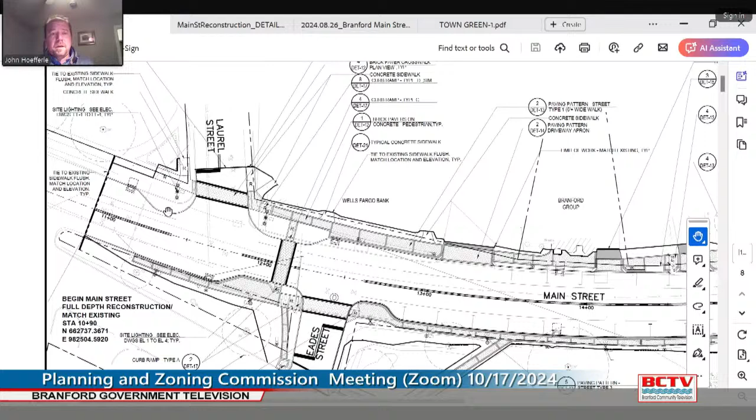So with that, I don't know if I'm able to share my screen... Good. I'll just run you through pretty quickly unless there are other questions you have specifically about the plans. You can see the limits are about Laurel Street, but Blackstone Library is here.

The police station is down Laurel Street, so that's where our improvements start. This is DOT Route 146 that comes down to South Main. There aren't a lot of substantial changes on the limits of where the brick or concrete in this particular area will be replaced.

We are shifting some of the curb lines down, like in this area - the existing curb is here. You'll see that throughout the project where we're creating neck-downs to try to slow traffic. We're also incorporating formal crossings at a lot of places where there currently aren't any.

I'll try to move through this slowly but quickly. You'll see there's a little bit of changes along the curb lines, but again, the limits of where the brick currently is will remain. We are adding, as I mentioned, the ADA accessibility standard, so we're adding here a flush condition, so now we'll be with the current ADA standards.

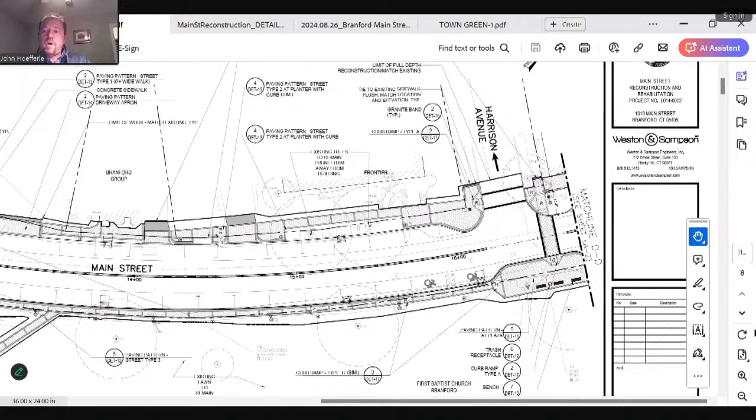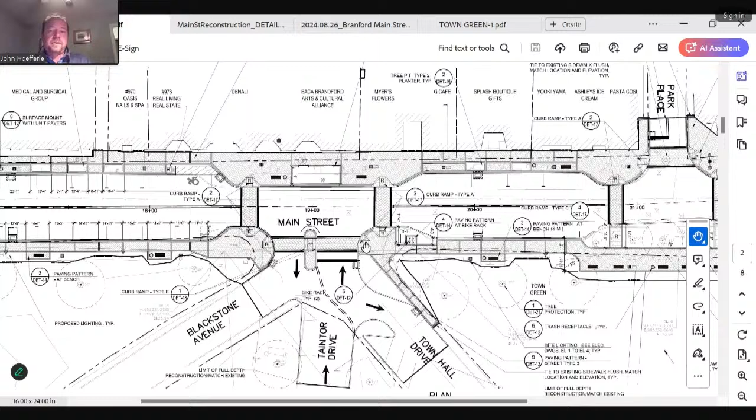That's a big goal of ours, really a requirement of ours for this project. We'll continue down. You'll notice that we are reconstructing this intersection at Town Hall Drive. Right now this is about a 70-foot crossing, and we see it all the time, women with strollers or men with strollers walking across that 70-foot crossing, looking over their shoulder because you've got traffic coming all over the place. So we are reconstructing this with a pedestrian island to shorten up those crossings here.

Long term, Town Hall Drive is slated to be reversed, so you'll enter off of Montowese Street and come through Town Hall Drive and come out. This is going to avoid a lot of conflicts that we see here, as well as, I'm sure everyone's left Town Hall Drive looking to the left and can barely see cars coming. We've got a little mirror up on a power pole if you didn't notice. You try to see anyone that's coming, and especially around festival time, it's a really dangerous situation.

Again, just making some improvements here to the brick. The brick will be clay brick, not concrete pavers. We've seen those pavers really deteriorate pretty quickly, especially with the amount of salting that we have to do in the center of town to keep people safe in the winter.

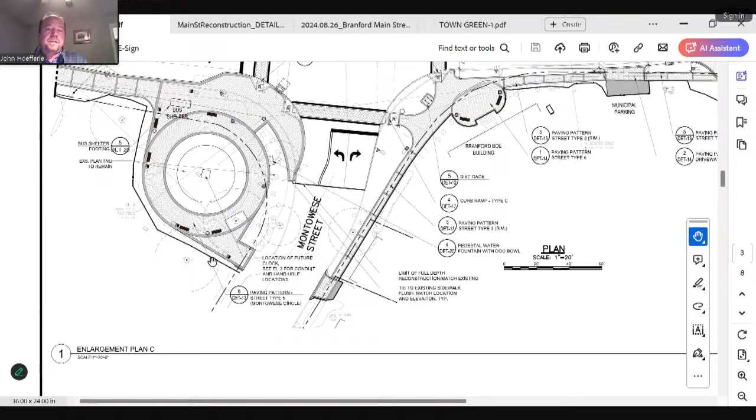So those will all be clay brick. We are extending out to the circle here around the Memorial Garden. And again, I mentioned this is a Main Street reconstruction, so we can only go so far with the money from DOT under that grant program. So as much as we'd like to continue down Montowese or down these side streets, we really have to stick to Main Street — it's a requirement of that grant.

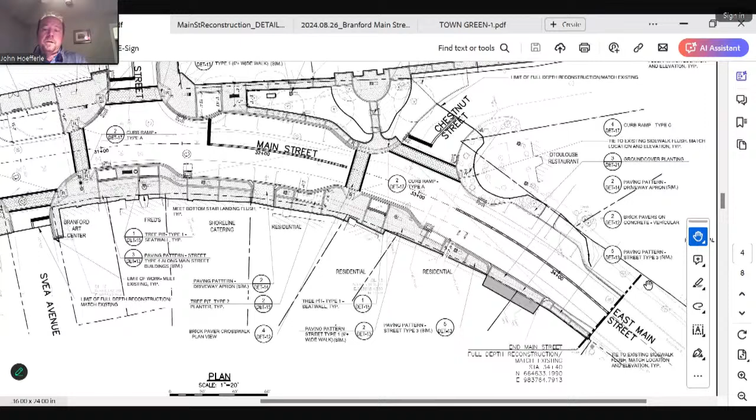We continue down. There's some grading that will be changing over here. We need to make all these buildings ADA compliant. Coming down this hill is pretty steep, but we're going to try to make it work as best we can. The other limit of construction is down here by the old Otoolouse restaurant past Chestnut, with plans to hopefully get the same type of funding for where we end here all the way to Route 1, to mill and pave and finish off the whole section of Main Street from a DOT roadway to a DOT roadway. So we do have some additional details to show you.

Some additional details to show you. We are trying to get street furniture included under this grant program, so that includes some benches, some bike racks in areas, and new garbage cans. These details give you a little idea of where we're trying to create some amenity zones, so to speak. We are also trying to get some rain gardens as part of this project, which we'll show you in a second here.

These are just some of the design elements that may be of interest. This is one of the main rain gardens that we will be creating, down by Ivy Street. You'll notice what looks like railroad tracks — that's a throwback to the trolley tracks that are currently still underneath Main Street. We're hoping to salvage some of those rails and use maybe some old salvaged granite curbing from this job to create that throwback to the heyday of Branford's Main Street, while also letting some of the street runoff be treated within a rain garden type of treatment there.

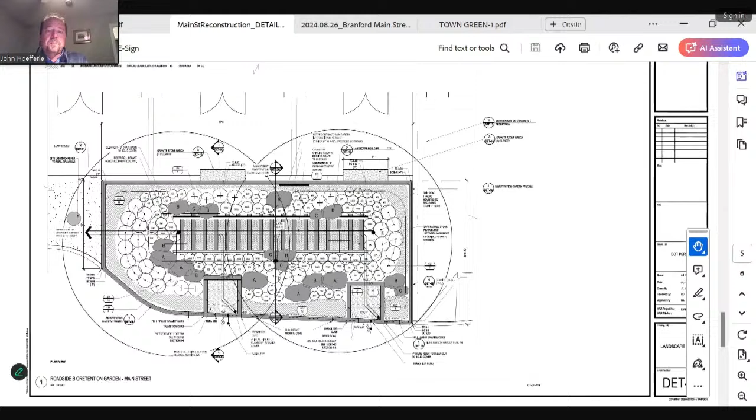Before I get into that, if any of the commission members have any questions on what I've gone over so far.

Thank you, Mr. Hoefferle. Any questions, comments from commission members on what's been said up to now?

I have just one observation, and it's kind of a multi-part observation. I think this is all great, and I understand the concept of brick as the go-to for pedestrian scale, human scale kind of stuff. But brick is also kind of a modular thing, and it works great in cities that have sidewalks laid out like graph paper, like Manhattan or Philadelphia. As I walk through town, I see the brick being tortured into trying to conform to curves, and you always get these sort of ridiculous little slivers. So I was happy to see some herringbone pattern in here, because that's a little more forgiving of that.

I got a tiny bit itchy when you said it's going to be clay brick, because even SW brick, which is what you would use as a paver, still has a hard burned exterior and a soft interior. So when you have these little slivers packed in there, you're going to have a slightly higher propensity for degradation with the salt that you're trying to avoid with the concrete brick.

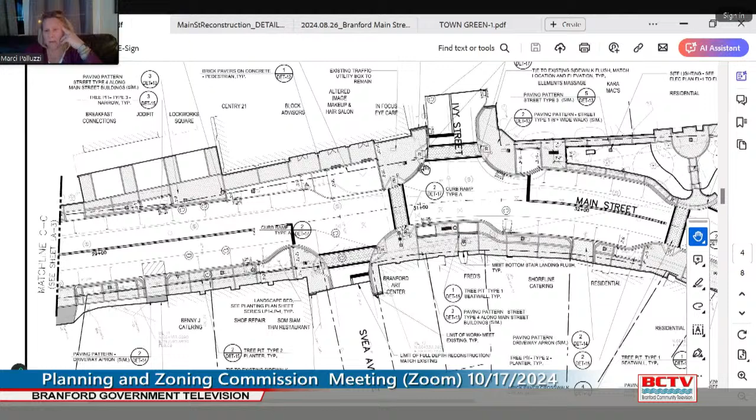I was just curious what discussions might have transpired about doing speed humps. I've noticed you've relied on chicanes as the primary way to still have parallel parking and slow traffic down at the intersections. I was curious if you'd done anything with speed humps. My other question is, I love the idea of a rain garden, but without a really good maintenance plan, that can become quite unkempt at certain times of the year. So I'm curious if we've got our arms around what that's going to take from public works to maintain it, to keep it beautiful as well as functional, because the function is a great idea. But those are really my two comments, and everything else looks fabulous.

As to your second point, yeah, that's something that's going to be considered by the town. There's money set aside for center maintenance, so whether that's hired out - right now I believe we do hire out the maintenance of those landscape beds - that would be something they'd have to pay closer attention to, especially in those first couple of years as things are trying to really develop.

But to your first question, we did hear a lot about speed humps and traffic calming. We wanted to avoid speed humps based on the fact that we have emergency vehicles that need to get through this area pretty quickly, and there's a lot of truck deliveries too. Between slowing down emergency vehicles and the noise from semi truck deliveries, plus school buses coming through, we wanted to avoid that and really try to just skinny things down as far as traffic calming, and make sure we have proper signage everywhere, because right now there's really a lack of signage through this area.

That's all going to be upgraded as we're required to through DOT as well. But we want to make sure that people are visible. When you get these bump outs and shorter crossings, people become more visible as they're waiting on the curb. So between that and getting enforcement stepped up throughout town, hopefully we can get back to that kind of attitude, because I think when you hit people in the wallet, that's when they really learn to change their behaviors. So, appreciate the comments.

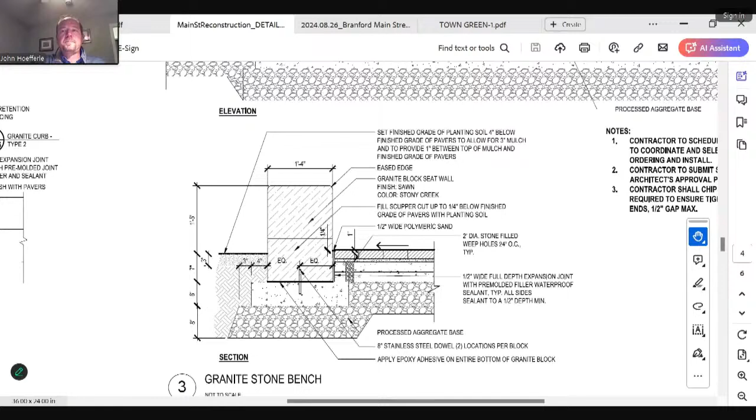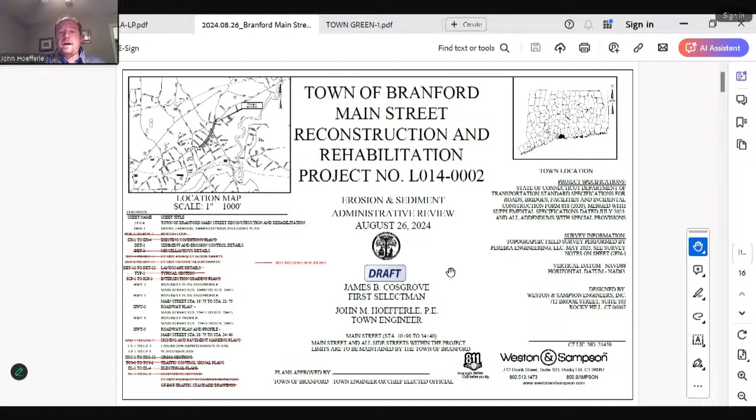So as part of this project, we are asking for concurrence from the Planning and Zoning Commission on our erosion sediment control plan. I know it's not exactly within the purview, since this is a right of way, but being that it's a sidewalk project, and mostly everything, I should say it's the road too, but everything is within a cut.

So we don't have slopes down except for really on this western side of the project, where we will have some silt fencing on the hillsides. There'll be inlet protection. It's a pretty simple erosion control plan on this.

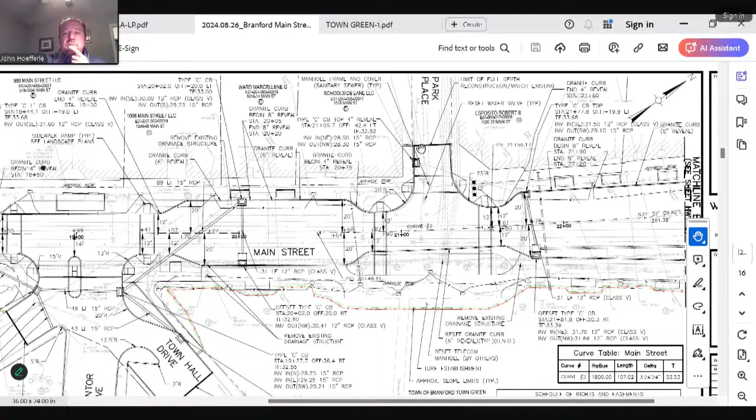I reviewed it, and just to get another set of eyes on it, I've asked the inland wetlands agent to review this as well. She had very minimal comments, and my only comments were to kind of protect some of these downhill inlets, because we know there will be some tracking on some of these side streets. So we do want to protect the inlets down the hill a little bit.

Again, it's not really a formal review, but hopefully you guys have had a chance to look at it and would agree that it really meets the intent of what your regulations are as far as sediment erosion control go.

Chuck Andres, Chair: Thank you, Mr. Hoefferle. I have one more question, comments? Sure, Marci. Yeah, I mean, you had mentioned that they were going to be rerouting, reversing the flow around Town Hall Drive.

And I know at one point there was some discussion of doing more of a roundabout, towards the library and Eads and Laurel Street. What happened with that discussion about the roundabout? And has there been any conversation about aligning Eads and Laurel Street and other traffic moves along those guidelines? Or were they just not within the scope of this project, or abandoned for some reason?

So the roundabout was actually going to be funded through this same grant program. And when we started looking at it, I wasn't around for the initial or final design of the roundabout. When we came in and started having discussions about that roundabout, we realized that DOT had a lot to say and a lot of role.

They took a very large role in the design of that, since it did start to include Route 146 in that roundabout. So instead of being just a regular roundabout, that thing stretched out forever, and included a lot of improvements on State Highway. And when we looked at the intent of this program, it was for local infrastructure.

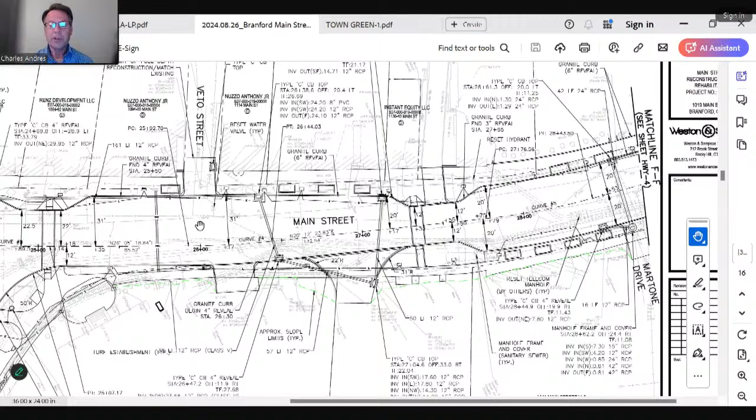Yeah, just one more thing. The town green came about - we ended up applying for a small town economic assistance grant, a STEAP grant, for the green. That's a $500,000 grant that we obtained for improvements.

Again, not changing a lot to the green. We understand it's a very historic green. We did consult with the Green Committee and the Forest Commission on what we wanted to do here, and they were in agreement.

The major change to it, I already mentioned changing the direction of Town Hall Drive. We're going to be adding a sidewalk along the frontage of this diagonal parking, which anyone who's ever parked there knows cars just pull off the edge of the roadway. People cross Town Hall Drive to get to the sidewalk on the north, or walk behind parked cars, which is not safe for people backing up and pedestrians.

So we're going to realign some of the sidewalks to the steps. This is the phase 1 drawing, so it doesn't show everything, but we're essentially keeping mostly everything the same, taking away a little bit on the south side to add a sidewalk.

On the second phase, and these are more preliminary plans, but we do anticipate replacing the walk across the green. Hopefully we have enough money to add and replace sidewalk along the north side of Town Hall Drive. And this is where you're going to see the raised crosswalk.

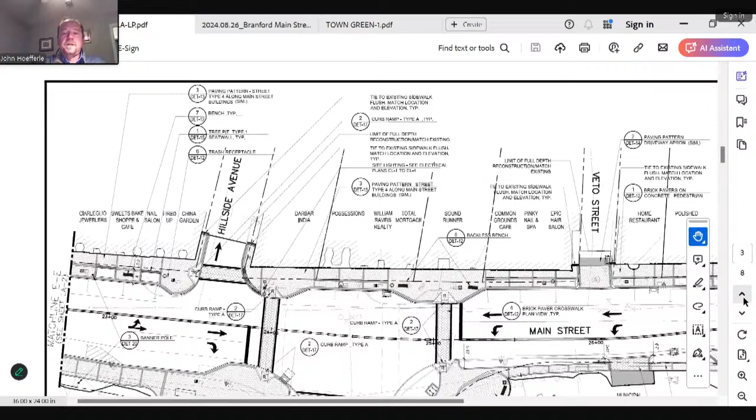So the initial plan for Main Street - again, we need to work on how we're going to get these two projects going. They're two separate funding sources, two projects, so likely two contractors. We expect Main Street to start up and do the majority of their work before we start trying to interconnect things with Town Hall Drive and the center of the green.

So this phase will likely happen first, where we get the pedestrian island in, and we'll still be able to maintain a temporary flow through Town Hall Drive the way it is.

And then as part of the Main Street project, once we have enough of the Town Hall Drive project tied in, then we'll likely make that switch on Town Hall Drive as part of the green project.

So it's kind of tricky. We're dancing around with, again, two different funding sources and likely two different contractors. But we do expect that the intersection here will be under construction or completed by the time we do Town Hall Drive and make that change.

So it's going to be a lot of confusion during the Main Street project. We understand that - there's going to be a lot of detouring, some closures of lanes and things like that. So we don't want to introduce everything at once and have nobody know how to get to Town Hall Drive, or have them coming in the wrong way when we've already switched it. So I think switching the direction will be kind of one of those last steps that we make towards the end of both these projects.

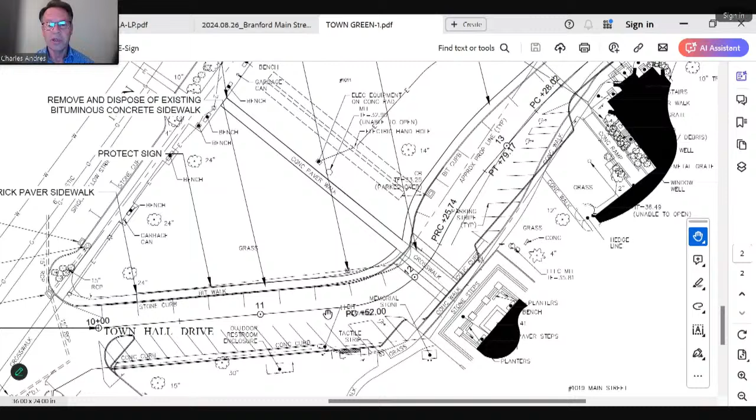I would think that's a fairly major change, and you would want to make sure that people know about it and hear any comments. You'd have to obviously change the parking layout as well.

And I assume it looks like you haven't done that yet. So I was wondering if you'd come back for that, or does this approval include that? Hopefully this would include that.

The striping isn't changed on this plan, but the curb lines are changed. The striping would basically just flip all the diagonal parking, and that's what you'd get with the final plan. So Town Hall Drive would be repaved and restriped to accommodate the flow from Montowese out to Town Hall, or out to Main Street.

Was there much public comment about the change in direction? No, actually the boards and commissions we went to were in favor of it. I think everyone understands how Town Hall Drive works and how it can be sketchy a lot of the times, so it was a welcome change.

John, are you going to have approximately the same number of parking spaces? Have you even really gone to that level of analysis yet? I'm not sure if we've designed and counted those parking spaces.

Main Street will be losing some spaces, because we currently have parking where there shouldn't be parking based on current standards, so we need to remove some. On Town Hall Drive, because of the switch, we may be losing those two spaces there and not be able to make them up, but the rest of the striping is compliant as is. So with the flip, I think we're just losing the two spaces there.

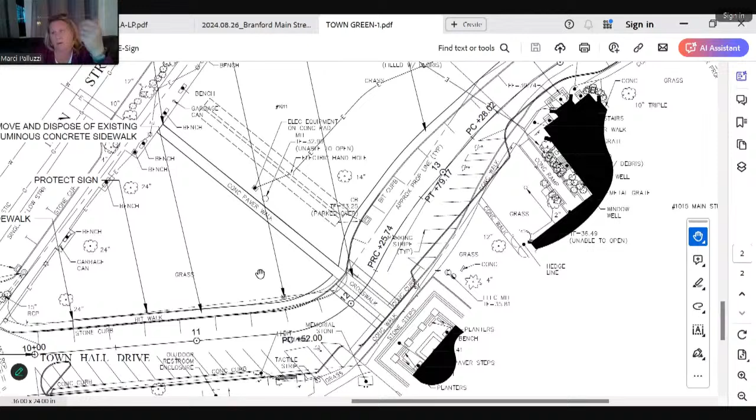So is all the electrical underground at this point, or are there existing lighting fixtures along that north edge of the Town Hall Drive? Everything's underground. And are all the light fixtures on Main Street being replaced as well, or are they just working with the same fixtures? Yeah, so all the electric is underground until you get to the limits of the Main Street project.

The wiring will all be replaced, and the light fixtures are all going to be rehabilitated. Those are all cast iron light poles, every single one of them, and we want to keep them because it's extremely expensive to replace them. You'd likely be going with aluminum otherwise, and we'd rather keep the cast iron. So those are slated to be sanded and painted, with an LED retrofit for all the lighting there, same color scheme and everything.

That said, overwhelmingly everyone said keep everything the same. So, we know change is difficult. Yeah, I understand completely.

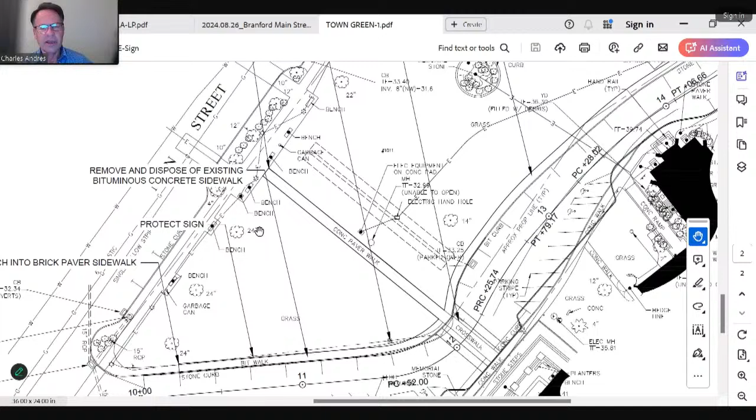John, the rationale for changing the direction, is it because there's a safety issue at the entrance? What's the main reason for that? So, we've got twofold reasons. Anyone who's pulled out onto Montowese on this side currently, the sight lines are terrible, especially looking to the left. I don't know if anyone's noticed, but on the power pole across from Town Hall Drive, there's a mirror there to try to see what's going on the left.

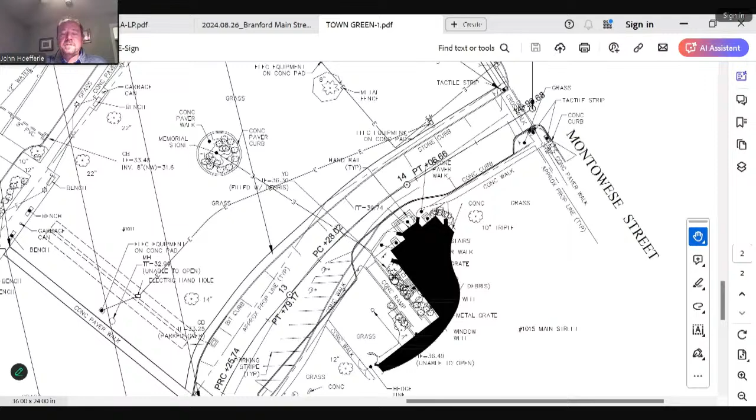Now, when you've got the festival, semi trucks are parked here, tents are set up here. It's very difficult, sight lines come through here, as well as we do see cut throughs from Main Street, trying to avoid the right turn at the light at Montowese to turn right on Montowese. So by reversing this, there's not really much reason to cut through, especially with the raised crosswalk.

And then once we get to the intersection, we can't really install this permanently and keep this flow without changing a lot of what's going on with Taintor and Blackstone. We can't reverse Taintor, that's where the school buses pull up from behind the church at daycare. And Blackstone wouldn't make sense to reverse. Just for this intersection, to get it to work, it really works well with reversing it on the Montowese side because you have that safety issue.

But the flow here would work really well where you have a stop for Town Hall Drive and a stop on Taintor. So this is kind of a natural flow, everyone coming to the right, and then coming from the left, you're just going down Blackstone. That's the only movement you'd have.

And this is integral to the project, we really wanted to shorten up this crosswalk. It is extremely wide and dangerous. We see people making U-turns trying to grab a parking spot, and sight lines aren't that great there either. People coming down Taintor have conflicts with people turning onto Blackstone and trying to turn out right. So it all kind of made sense once we started to consider reversing Town Hall Drive.

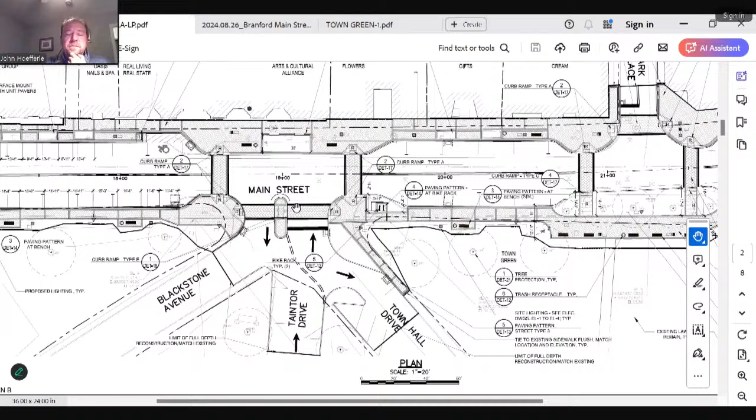I do think there's opportunity for some better design elements in front of the town hall, to feature more of a plaza pedestrian link on the opposite side of town hall as a bridge or entrance way to the green. I get that the engineers are engineering it, but I'd really love to see some landscape architecture developed as an idea. Because the town hall is the focal point and we're not highlighting it nearly enough from a landscape perspective. I do agree with all the traffic moves you're making, and the brickwork and all that work downtown is fabulous.

I think it's falling a little flat in front of the town hall. We've put a lot of time into the stairs, and that side, the main side, is fine. But once you cross the street, there's no transition to the green, or the way the green interfaces with the town hall. I think it just hasn't been thought out enough from a design perspective. When they added the direct walkway, that was a great improvement, but I think we could go further if we take a more forward-thinking approach to how the town's evolving, and not get so stuck in the fact that it's the traditional town green, where there were never curbs on the green, or whatever the more historical viewpoint is that's kind of holding it back.

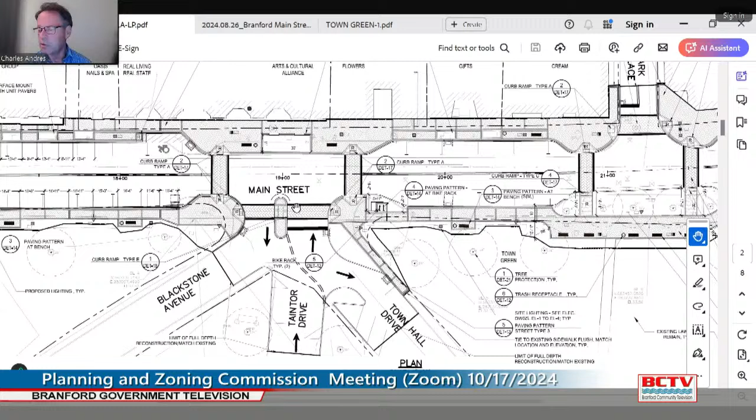Anything else, Mr. Hoefferle? That's all I have for you tonight. Okay, so I think you're looking for a positive 8-24 referral with respect to this proposal, which had three components: improvements to Main Street itself, erosion control, and the areas along the green with sidewalks, the change in directions, and other improvements. Does anyone have any comments? If not, does someone want to make a motion that we provide a positive 8-24 referral with respect to this town project?

Chadwick makes that motion. Is there a second? Marcy will second it. Any further discussion? All those in favor? Joe Chadwick is in favor. Marcy is in favor. Joe Vayuso is in favor. Fred, I see you've joined us, I don't know if you heard the discussion. You did? Okay, are you in favor? You're muted right now I think. Okay, I'm unmuted now, yeah I'm in favor. Great, and the chair is also in favor. Thank you, Mr. Hoefferle.

Thank you everyone. With that, we'll move on to our public hearings on the agenda. I'll start by just going through the items. Item number one on the agenda is Premier 200 North Main Street LLC.

This is 206 North Main Street, which opened the public hearing at our last meeting, and I believe we continued it to our November 7th meeting. So we're not moving forward with that one today, since it was continued to November 7th. Again, that's a special exception for the automobile service facility, so it's on our agenda but we don't have to do anything on it. Is that correct, Harry? Harry Smith, Town Planner, that is correct, yes.

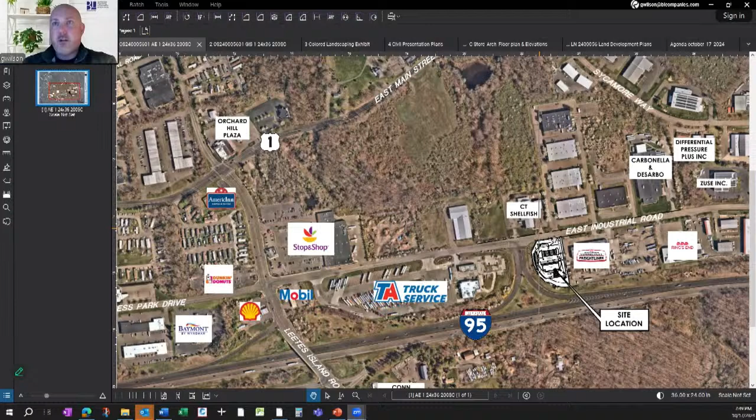The site is located here off the I-95 off-ramp. As you can see, all the local businesses there: existing gas station, Stop and Shop, CT Shellfish, Freightliner next door. We are in the IG2 zone, industrial use.

As you can see, we're fully within that and in with similar businesses. I'll jump to the landscaping plan first. This is a very odd shaped parcel, as Sarah just mentioned.

I-95 is at the bottom of the page, with the off-ramp wrapping round to East Industrial Road, which crosses our frontage. We also have a DOT non-access line, which basically starts from the bottom corner all along the ramp, for obvious reasons, and then along East Industrial Road to this point here where my hand is, hence why our entrance is in the top right-hand corner.

As you can see, we've got a mix of pumps, both front and rear. Front for smaller standard traffic, cars, small trucks, and then larger vehicles, mainly contractors with trailers or small equipment at the rear for separation. The C-store in the middle here is 5,010 square feet, with underground storage tanks to the left.

And then various underground surface water detention basins, one in the front, one in the drive aisle, and two open basins at the rear. Again, we've got the trash enclosures at the rear and the loading zone too.

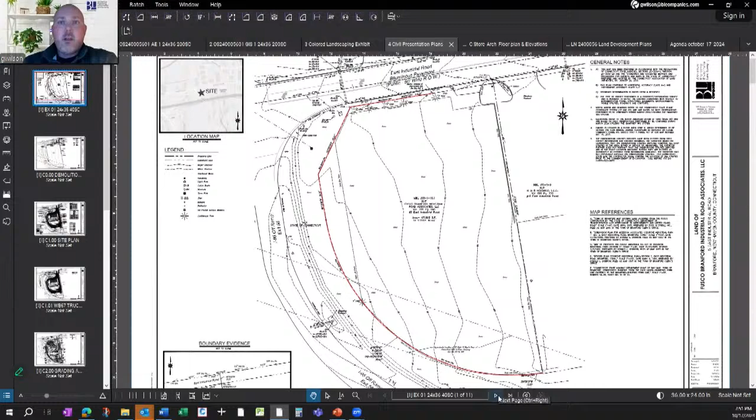The red line denotes the access, the DOT access limits, only opening up the front. Jump across to our site plan, we can show you a bit more detail.

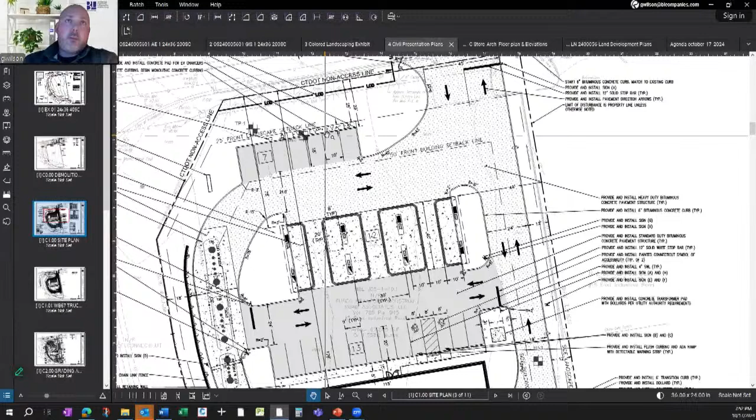situated there. We have access from both the rear and the front to the C-store. And if I just forward on, one of the questions from the town engineer was just to show why we needed such a large drive aisle curb cut.

So the largest truck here shown is a WB67. It's slightly larger than the gas tanker that will come to refuel the station. But as you can see, coming into the site, it has to make a 180 turn, which means quite a wide swing, therefore the wider entrance.

But as you can see, he can come in, around, load up the fuel tanks, and exit around the rear. And that's the plan for any larger trucks, although this really isn't the clientele that we envisage, but rather small to medium-sized vehicles using this gas station.

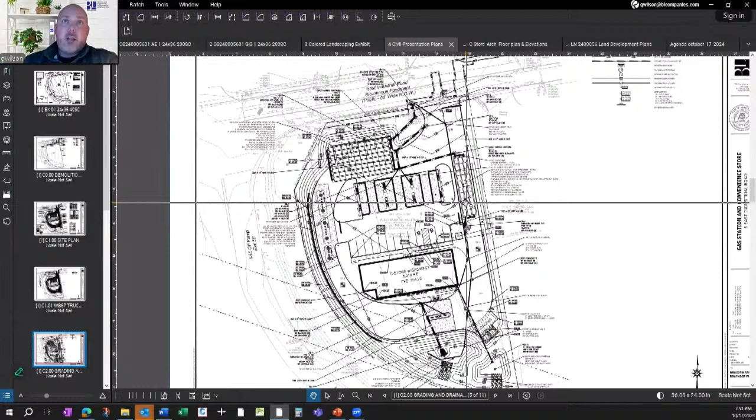Then we come to the grading and drainage plan. We've raised the site slightly, mainly because through our geotechnical investigations, we came across rock around 4 feet beneath the existing surface. Therefore, to fit the drainage systems in and actually create some depth, so they're not exceptionally shallow, we had to raise the site slightly, and we do have a retaining wall along the left-hand side here.

2 underground detention systems in the front and 2 at the rear, open at the rear.

Utilities all come in through the single curb cut because of the DOT non-access line, but all services come in there: water, gas, electric, and sewers go out there as well.

For sediment erosion control, we have the erosion control matting all around where we're regrading, which is basically around almost the entire perimeter. We have our vehicle tracking as we come in, washout pits, and then the temporary material storage shown there too.

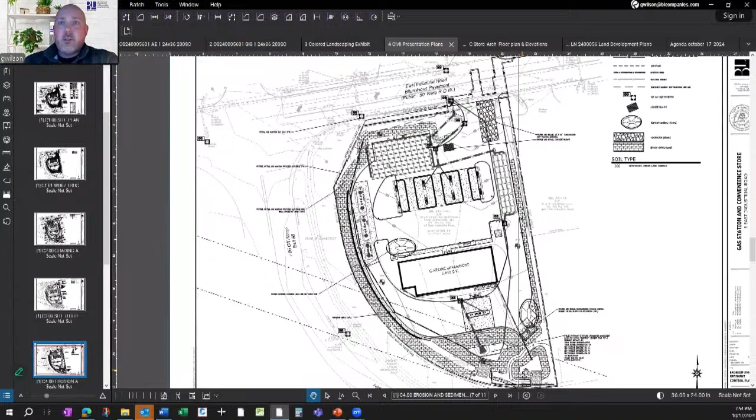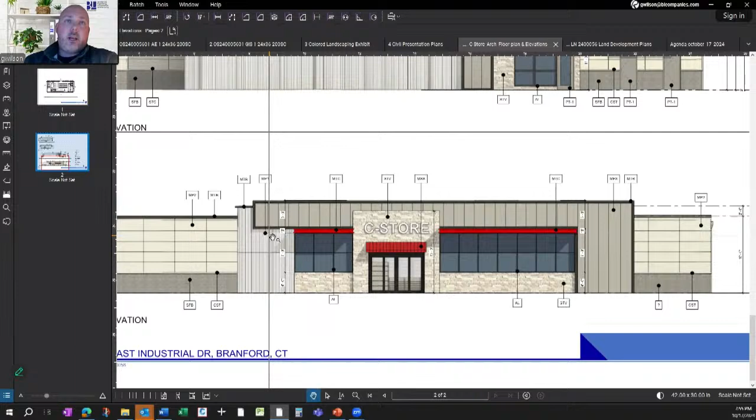To give you an idea of what we're looking to actually build, it's a fairly modern looking building, nice mix of materials, a lot of difference in height, elevation materials. We got stone veneer, metal siding, paneling as well. It's the front. And then the rear, we got the same facade as well.

So this will be visible from I-95. So it wants to look pretty as well.

Sorry, I thought it was a question. If there are any questions, please feel free to interrupt.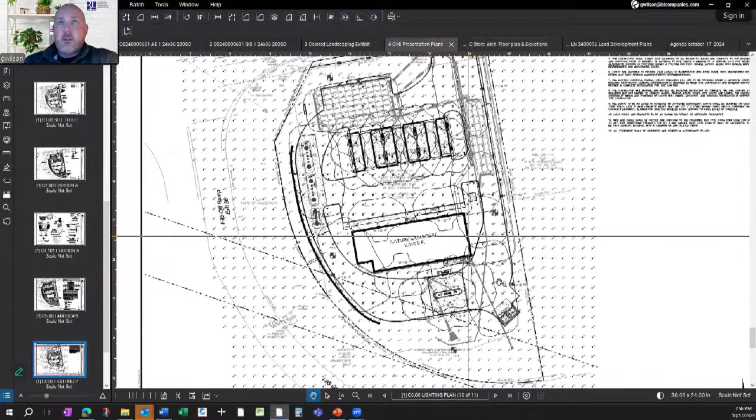Just jump back to the lighting plan. Again, we've been discussing with the town staff as well, and I believe we've satisfied all the criteria for lighting. We have canopy lightings, we have pole mounted throughout the site, and then wall lightings as well on the building.

And finally, again, back to the landscaping, with several trees remaining along the front. New maples been planted, oaks as well. Lots of shrub along the edges of any of the gas pumps right behind them, and completely surrounding the building, all along the retaining wall here, and in the trash enclosure as well. So quite a substantial amount of planting on this site as well.

If anyone doesn't have any questions on that at the moment, I'm going to pass to my colleague Mike Dion to walk you through the traffic.

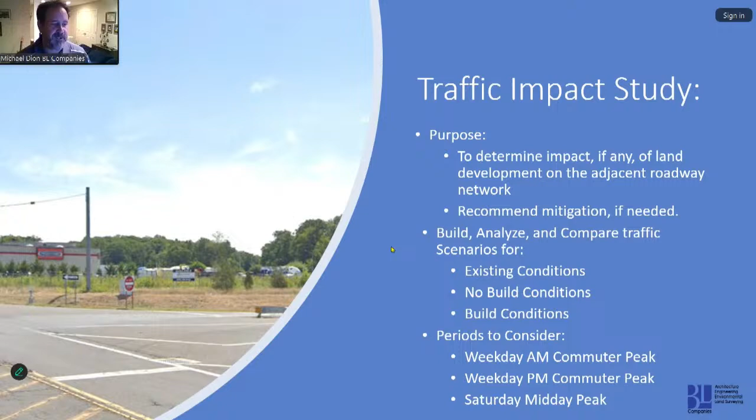This is, as Gareth had shown before, an overview of where the site is. At the off-ramp from I-95 South, we studied the intersection right there, the signalized intersection. We also looked at East Industrial Road at Leetes Island Road. We looked at the other on-ramp to I-95 right there at Leetes Island Road, and also the on-off ramps from 95 North with Gould Lane.

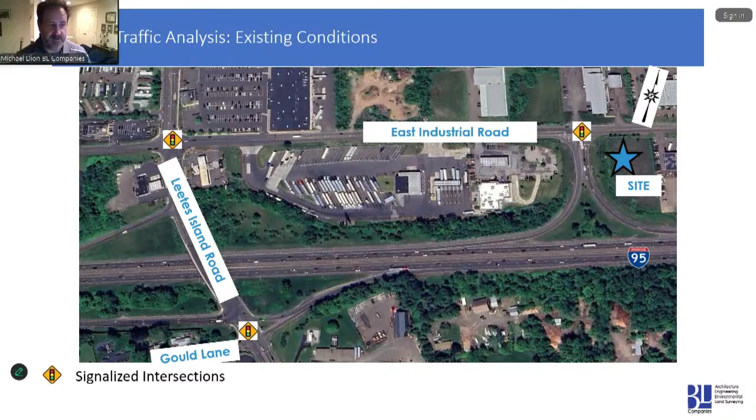What we do is go out and do a data collection effort. We do traffic counts at all those intersections for those peak hours that I mentioned. We did these counts in February of 2024, as I mentioned, AM, PM, and Saturday.

We also sent our traffic counts up to Connecticut DOT Policy and Planning to get their approval, make sure they were good with the counts. We do that on all our studies just to give everyone that little bit extra level of comfort that somebody else has looked at them.

We also do a field inventory where we go out and take pictures. We get traffic signal plans from the Department of Transportation. We want to make sure that those plans accurately reflect what's out in the field, so we go out and do that.

It was very easy for me. I do live in North Branford, so I drive through the area six times a week because I go to the YMCA either before or after work. So I'm either going through there in the morning on my way to Meriden or on my way home from Meriden because I go to the Y.

We look at the no build condition. What that is, we projected our traffic counts to 2025 when we expect to build this, and looked at the traffic during that period to make sure there are no issues in the no build condition.

We also discussed with the town and the Office of State Traffic Administration to make sure there's nothing else approved in the area, and there were no other approved developments that we'd have to include traffic for.

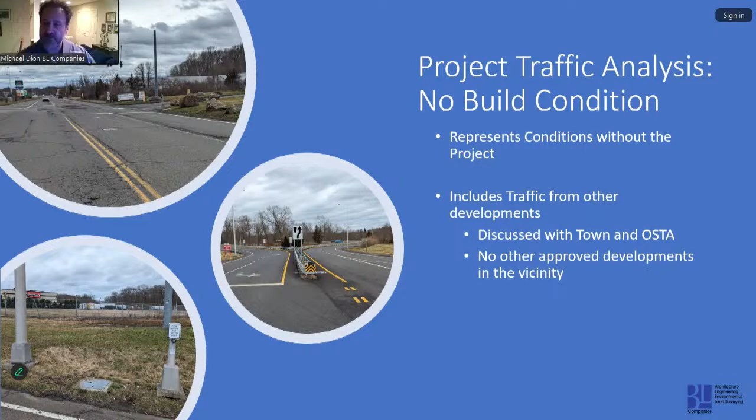Then we do our build analysis. We take these intersections and look at the vehicular access, which will be on East Industrial Road. It's just the one access point.

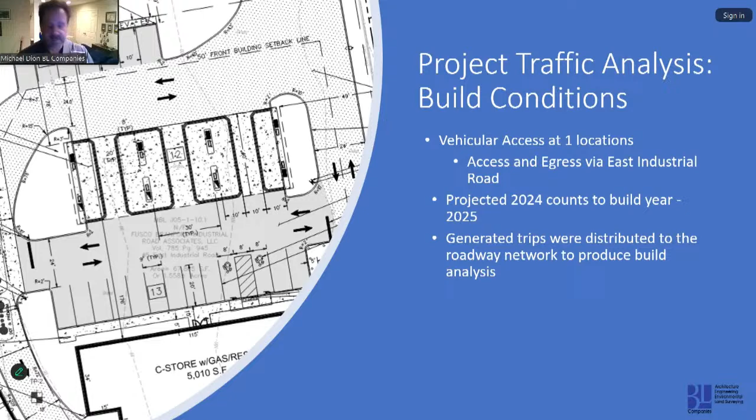We take our traffic volumes that we did and project them out to 2025, just a 1-year projection at about a 1% growth rate. Then we use the Institute of Transportation Engineers trip generation manual to generate the expected trips from the convenience store. The ITE has been around for 70 years collecting data for different types of land uses, and that's where we come up with the expected number of trips for the site.

After that, we take our no build condition, add our new site traffic, and that's our build analysis.

According to the Institute of Transportation Engineers, looking at the three peaks we have, it would be expected to generate about 170 trips in the AM and 145 trips in the PM peak hours.

And that includes what we call a diverted trip, basically traffic that's already on the road, where this is not their primary destination. So it's traffic coming off of 95 south, getting gas, getting back on 95 south. It's not like you weren't leaving your house to go to that convenience store, it was a place you were going on your way to somewhere else.

We accounted for 55% of that traffic as being diverted trips. That's the most the DOT would allow us to do. According to the Institute of Transportation, we could go up to about 65% diverted or pass-by traffic.

We take all those numbers and put them into a program called Synchro, where we analyze the traffic, and it gives out a letter grade, A through F, just like in high school, A being the best, F being the worst. That's the delay at each intersection, basically how many seconds you expect to sit at a traffic light before you're expected to move again.

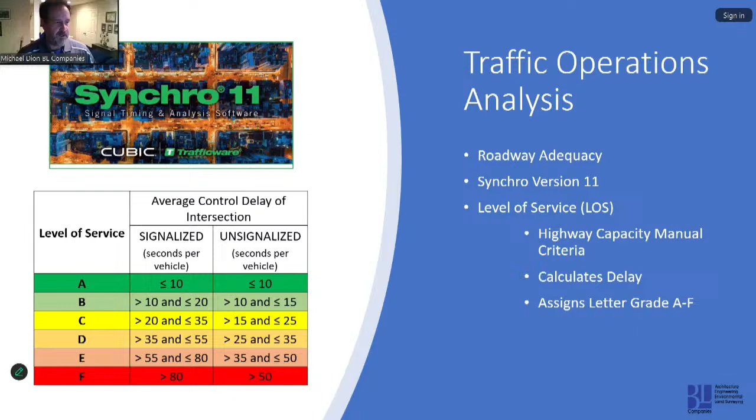So we looked at all of those peak hours, put them into the program, and came up with what they call the level of service, that letter grade. As you can see from our charts here, between the build and no build condition, there is no level of service change at any of the intersections. The levels of service stay the exact same before and after.

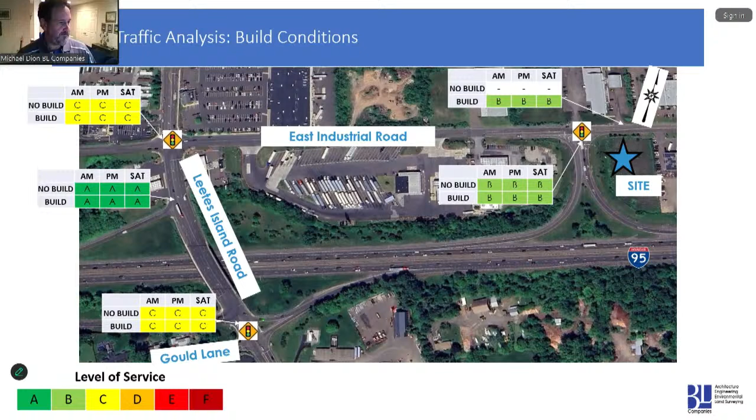So at the end of the day, what we recommend is making sure that any vegetation within the sightline triangle at the driveway is clear. Make sure any landscaping being done is less than 2.5 feet tall, so car drivers can see over it. And we want to make sure there's a stop sign or stop bar installed at the site driveway.

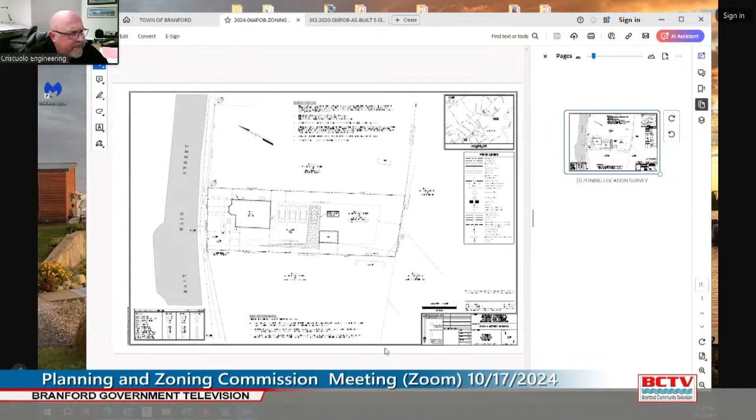I believe, according to Evan's staff report, we meet generally all the conditions. There was a comment about no landscaping plan, but basically there's mature trees and landscaping already here, and none of it's planning on being removed. I believe, and I have a photo I could show you, but right now there are multi-family houses on both sides, and across the street is a restaurant with some units above. So this area has quite a few multi-family buildings in it already. If I stop sharing, I think I can share.

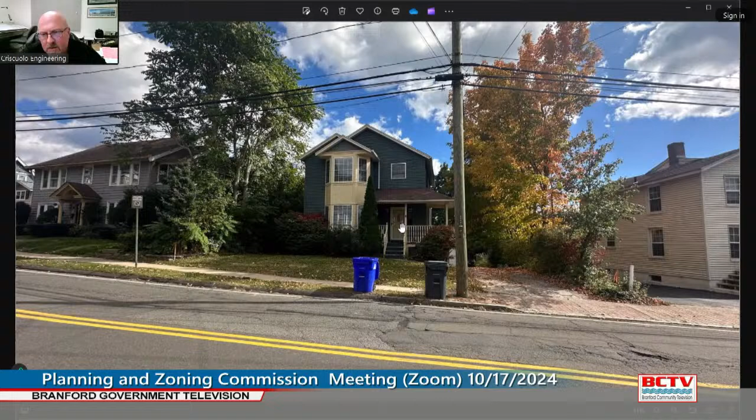So, hopefully you're seeing the photo now. This is the house we're speaking of. There's mature trees and landscaping all around here, so there isn't any more being proposed at this point. The work is internal, so that's really all there is to it. There's not a lot of activity going on here.

Chuck Andres, chair. Thank you, Mr. Preddy. Evan, did you prepare a staff report on this one? I did. Like Mr. Preddy stated, it's a conversion of a single-family home with no site plan changes other than the addition of a parking space into a 2-family residence.

They meet the bulk requirements of the BR district. There was no outdoor lighting proposed; however, I did add a condition that lighting has to be compliant with section 6.7. Based on the application materials, it appears that the special exception criteria are generally satisfied. They appeared before the Town Center Board on October 9th and received a vote to accept. Staff recommends one finding, that the proposed use is consistent with the special exception criteria, and any lighting has to be compliant with section 6.7.

Thank you, Evan. Any questions or comments from anyone before we open it up to the public? Hearing none, let's see if there's any public comments on this proposal. Does any member of the public wish to comment on this application?

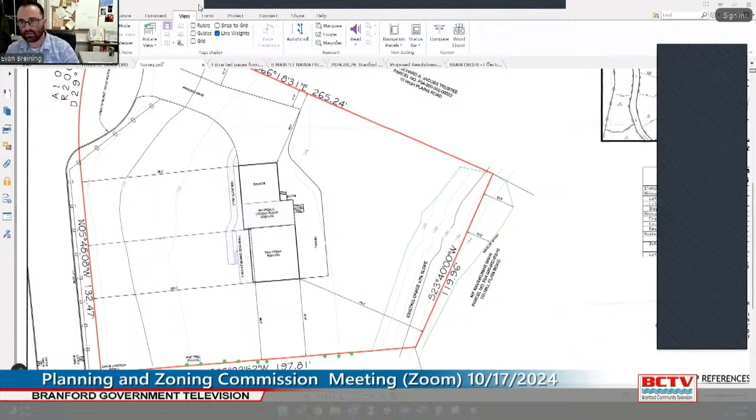Chuck Andres, Chair. Thank you, Evan. Any questions, comments from commission members before we open up to the public?

Hearing none, then let's open up to the public. Does any member of the public wish to comment? Evan, do you see anybody? Just to reiterate, there's a raise hand button at the bottom of your screen. You can type in the chat that you'd like to participate. I do not see anybody though.

Does the applicant have anything further it'd like to add? Nothing on our end. No, pretty much. Any further comments from commission members or staff? Hearing none, then we'll close this matter as a public hearing.

And again, something maybe we'll take up in a little bit. Thank you very much. Thank you.

That brings us to item number 8, North Branford Road LLC and 23 North Main Street LLC, care of Dan Iamuno, applicant owner, 13 and 23 North Main Street. This is a special exception for an auto body repair. I believe this is something we had before us previously and some resubmitted, but they also have submitted, I guess they didn't submit the grading application until recently.

So that's under new business. My understanding, the thought was to open this and continue it to our next meeting, and then we could hear them both at the same time. Is that correct? It's actually a parking modification special exception. Oh, parking modification special exception. That's the second one, not a grading. I'm so used to gradings.

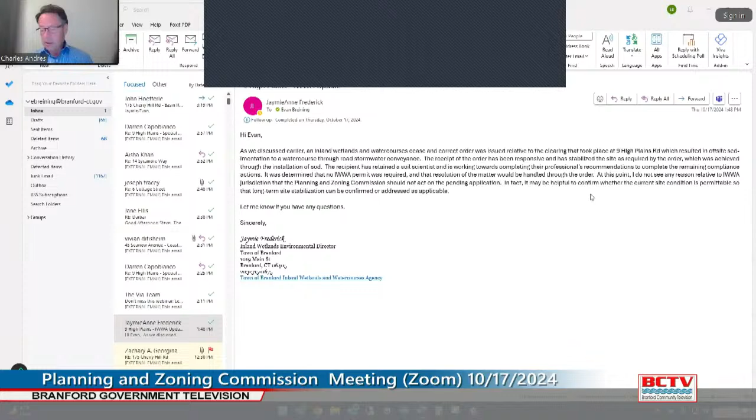So with that, I think that completes our public hearing items. Why don't we go ahead and take up the items that look like we might be able to address tonight. First one, I think, is items number 4 and 5, right? That was 5 East Industrial Road, the convenience store application. We heard from the engineer, the traffic expert, the attorney on that one. No public comments. Evan, you want to pull up your staff report?

Can you guys see it? Yes. So I think you reviewed that with us, and I think you added that number 4 from the one that was mailed out to us. Is that right? That's correct.

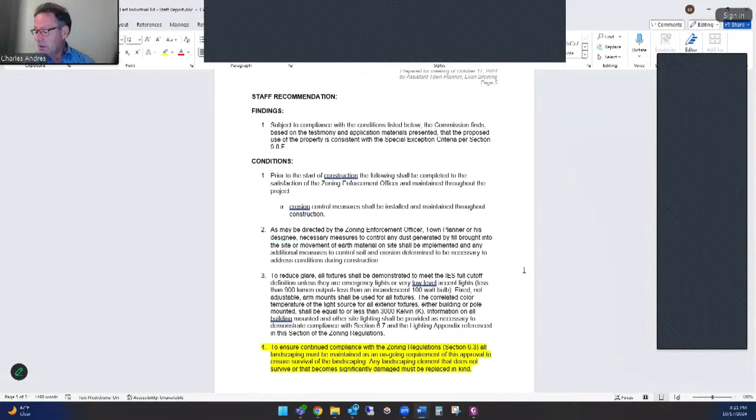Before we actually vote on the proposed findings and conditions, anyone have any discussion about this? Anyone want to make any comments? Seems fairly straightforward, seems to comply with the regs, no traffic issues. Unusual lot, and...

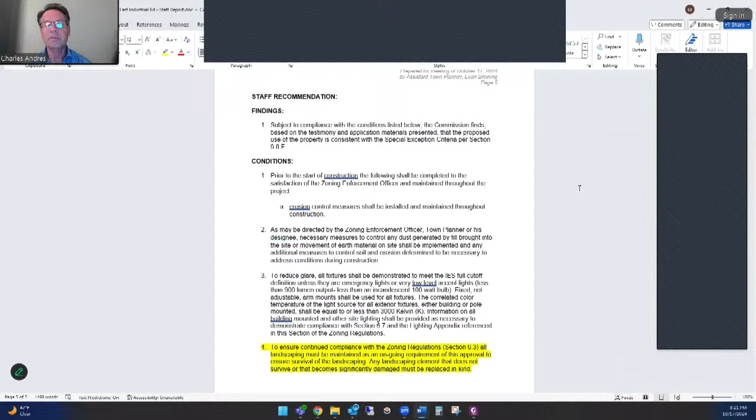Any commission members have any comments? Before you guys vote, could you make a determination on the wider driveway entrance? Should that be a separate motion? I think it's best if it's a separate motion, since you're technically modifying the requirement. And we have authority to do that in the regs, right? Yeah, based on the town engineer's recommendation, yes.

Assuming no further comments, looks fairly straightforward, so why don't we start with that. Someone make a motion to authorize the widening of the driveway entrance as recommended by the town engineer for turning movements with respect to this application. Did I get that right? Yeah, that's per section 612C1, just for the record.

Fred Russo will make that motion, Marcy seconds. Any further discussion? All those in favor: Joe Chadwick in favor, Fred Russo in favor, Marcy in favor, Joe Vayuso in favor, and chair also in favor.

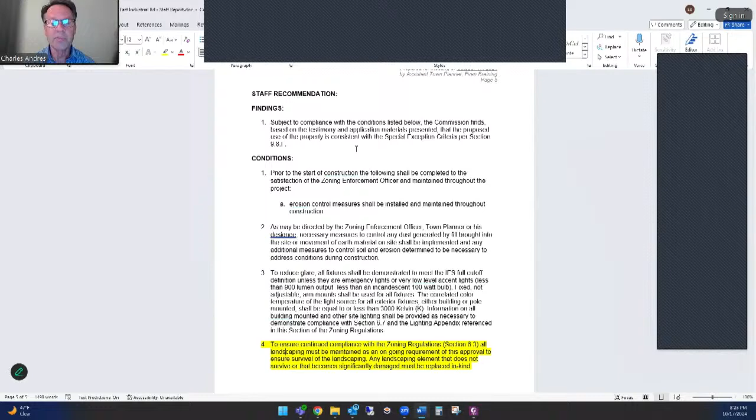And then as to the application itself, again the staff has made recommended findings, reviewed it during the public hearing, and it's displayed in front of us right now. So if it looks good, does someone make a motion to approve the application by adopting the findings and conditions in the staff report?

Marcy will make that motion. Is there a second? Chadwick will second. Any further discussion? All those in favor: Chadwick in favor, Fred Russo in favor, Marcy in favor, Joe Vayuso in favor, and chair also in favor.

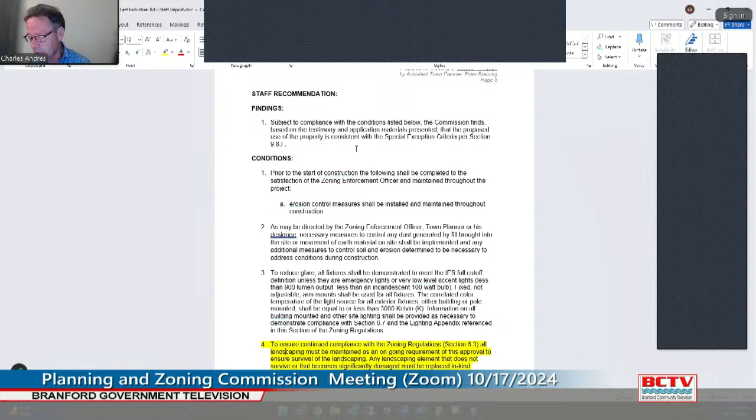So that application is approved. Thank you very much, everyone. Let's move on to item number 6, the 9 East Main Street special exception, 2-family residential.

Again, Mr. Preddy presented that. It looked like the only changes were interior changes, no changes to the site itself, and it's in an area where there already appears to be a number of 2-families. Anyone have any comments on this one they'd like to make?

If no one has any comments, someone make a motion to approve the application by adopting the findings and condition recommended in the staff report that Evan has presently displayed in front of us.

Fred Russo will make that motion. Is there a second? Chadwick seconds. Further discussion? All those in favor: Chadwick in favor, Fred Russo in favor, Marcy in favor, Joe Vayuso in favor. Great, thanks. So that application is approved.

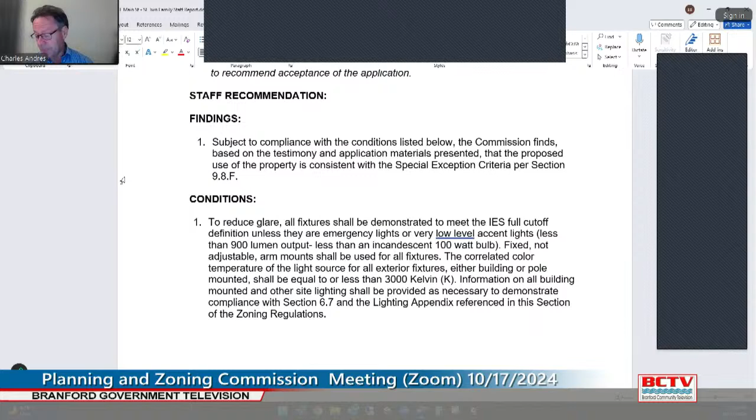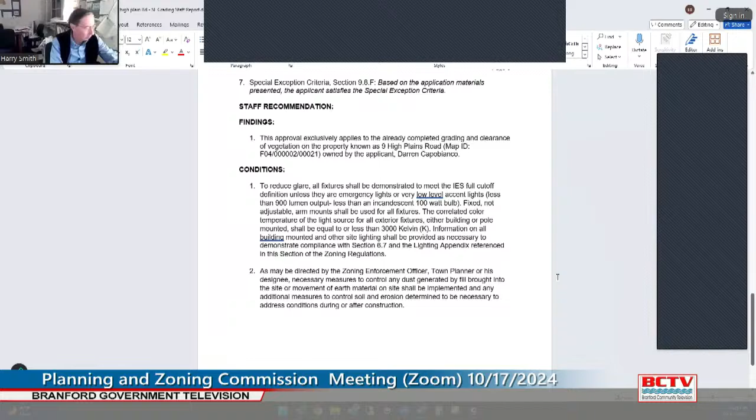And then I think we can also take up item number 7, Mr. Capobianco, 9 High Plains Road, the grading public hearing that we just heard. Looks like it's been completed, and Wetlands recommended we move forward with this. Again, no public comment on this.

Is there anyone have any comments about it? If not, someone make a motion to approve the application by adopting the finding and 2 conditions in the staff report presently displayed in front of us.

Joe Vayuso moves to approve with those 2 changes, the finding and 2 conditions. Is there a second? Chadwick seconds.

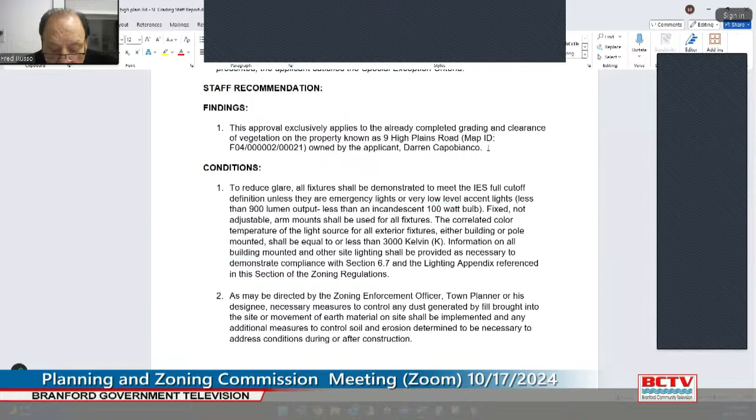Any further discussion? All those in favor: Joe Chadwick in favor, Fred Russo in favor, Marcy in favor, Joe Vayuso in favor, and chair also in favor. So that application is approved.

That brings us now to minutes. We have two sets of minutes, September 19th and October 3rd, that are on our agenda. Why don't we start with September 19th?

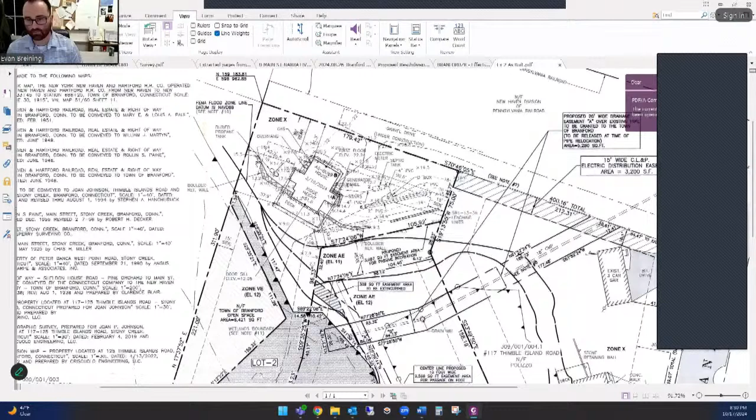Certainly, one second. So this is a single family home application that was in front of you guys in 2022 for this interior lot off of Thimble Island Road across from the theater. They submitted a 6.8 to us during the construction. This grade was changed just a little bit off of what was originally approved, and a retaining wall was installed on both sides of the house. So this just required a modification of the special exception 6.8 approval. That's really the only difference between the approved plan and this one. They meet the 3-to-1 slope requirement.

And that is about it. No requirement for erosion control measures because all the work has already been done. Based on the application materials, the special exception criteria is satisfied, and you guys voted to waive this public hearing back at the October 3rd meeting.

Thanks, Evan. I think you did a staff report on this, and there was a finding, and looks like a couple standard conditions. One finding that the special exception criteria is satisfied. The two conditions I proposed were that all conditions of the previous approvals shall remain in full force and effect as they may apply, and any lighting has to be compliant with section 6.7.

Are there any comments from any members of commission or staff? Okay, it seems fairly straightforward. Do you want to display your staff report? I know it's pretty standard, but I don't know if you have it available. You got it.

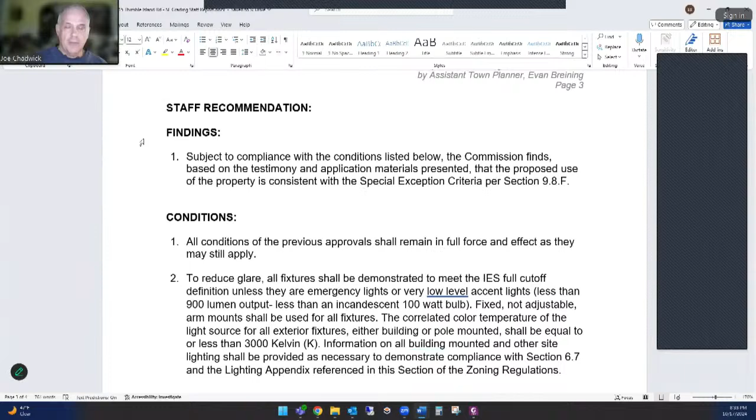Chadwick makes that motion, seconded. Any further discussion? All those in favor: Joe Chadwick in favor, Fred Russo in favor, Marcy in favor, Joe Vayuso in favor. Thank you, Joe. Okay, so it looks like that application is approved and it's off our agenda.

So then item number 3 under old business, again we need to schedule a public hearing for that one. Item number 4 is a zoning text amendment - that's the Stony Creek Architectural Review Board proposed changes, scheduled for November 7th. So that's it for old business. There's a number of new business items.

Fred Russo: I'm not sure, but did you miss correspondence? Chuck: Yeah, I think I did. Good call, good catch, Fred. Any correspondence, Harry? Despite that, we have no correspondence. So perfect, but you never know.

That's right. Okay, so let's go on to new business. Item number 1, Melinda Formica, owner, 21 Burr Street. I think we need a public hearing for this one, right? So we'll have to set up a public hearing date for that one, and we'll do that in consultation with staff, I assume. Is that right, Harry? Harry Smith, Town Planner: yes.

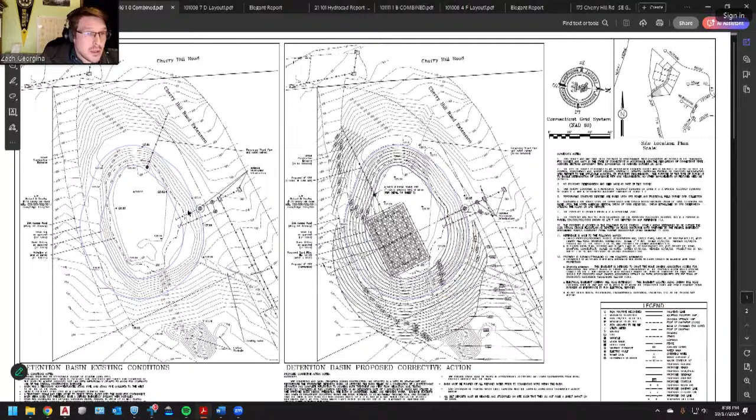Fantastic. So the first thing on the agenda was the detention basin itself. What we're looking at here is a side by side - the left side is the existing conditions of the basin, and the right side is what we are proposing to restore close to the intended function of the basin. Presently, the basin has been partially constructed on site. This is to be the primary stormwater system for the public utilities and several of the lots, for stormwater mitigation taking care of the Cherry Hill Extension, new public right-of-way, and several of the homes. The basin is to be part of the HOA's responsibilities. It exists as part of Lot 7 with a stormwater easement in favor of both the HOA and the town to allow for maintenance, primarily being for the HOA. What we have today is essentially a basin that's been partially constructed, with the stormwater infrastructure entering the basin installed, including the hydrodynamic separator and catch basins within the proposed right-of-way. Zooming in here, we can see catch basins installed, the hydrodynamic separator with overflow bypass - that is installed. The basin itself, if we look here, the blue rings represent the basin as proposed, and the top of that basin as proposed.

If any of you are apt at reading contours, you can see that this basin is presently about 35% undersized and has been utilized by some site changes from the contractor as a temporary settling basin, essentially resulting in a swimming pool, more or less, and not a detention basin that was reliant on infiltration.

So what we're looking to do here is give this a retrofit into the basin, restore it close to volumetrically what was approved. Because of the situation with it becoming silted and used as a temporary sediment basin, infiltration can't be relied upon. There are typically actions that can be taken, but without significant over-excavation in an attempt to restore this, the most reliable option is to install a sand filter or some sort of under drain.

By going this approach, it allows us to essentially mimic what was the original 2021 existing conditions. Obviously, the site currently is a lot of dirt and a new right-of-way, so going back to where we were from the approval standpoint is really where we want to be looking for the stormwater elements.

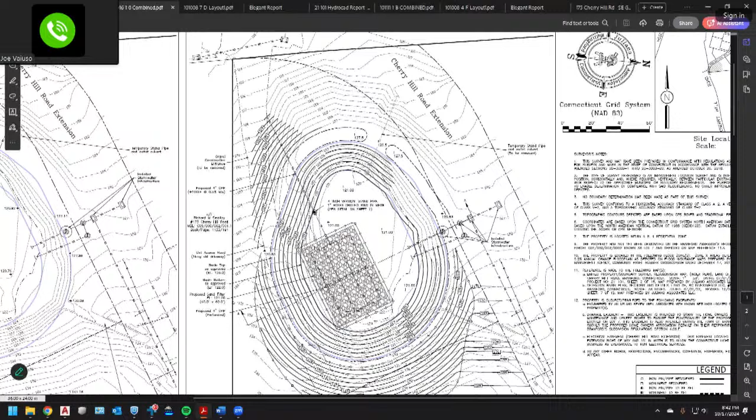Thanks. Joe Valuso? Yeah, I also agree. This is an engineering situation more than anything else. Right, and I agree as well.

So let's make a motion. Someone want to make a motion to waive the public hearing for item number 3, 175 Cherry Hill Road, Lot 7, the modification of the detention basin. Fred Russo will make that motion.

Motion by Fred to waive the public hearing. Is there a second? Chadwick seconds. Second, Joe Chadwick. Further discussion? All in favor? Joe Chadwick? Joe Chadwick is in favor. Fred? Fred Russo's in favor. Marcy? I'm in favor.

Joe Valuso, in favor. Okay, so why don't we get to the merits then of whether to approve the change.

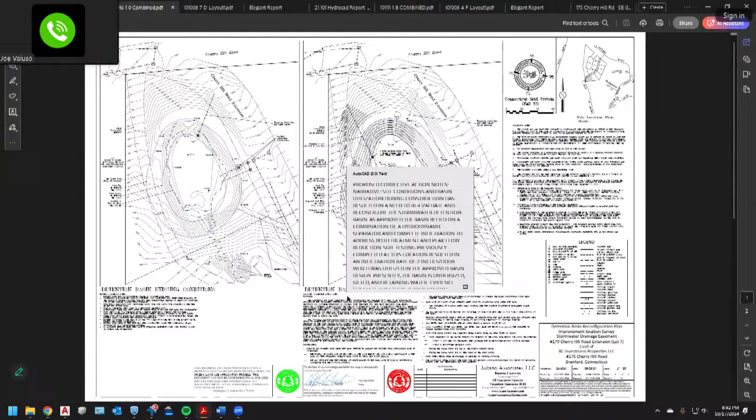It seems to me that if the town engineer is good with it, I'm good. It just seems like a technical issue that I would want our town engineer to look at, but if he says fine, that would sort of be my reaction to it.

We did receive some comments from the town engineer this afternoon. I hope Zach received them. I sent them over to him. So I do think there are some outstanding issues on his end. I just want to bring that to his attention.

Yeah, I did receive those, Evan. Going through them, I don't think there's anything here that isn't a condition of approval level. Essentially, it's very, very correctable, and some of them I think a conversation between the town engineer and myself would alleviate. If I can continue, Evan, do you want to run through his comments, or do you want me to just run through them and address them?

Because I have looked at these. So what we're seeing here is the email itself. His comments were: inlets of the basin at the end of the outlets should have energy dissipators. Details were included, but those were, for the sake of clarity, not included on the drawing. I can add those to the drawing, but it's not a problem.

In lieu of an open outlet discharge to a slope up gradient of the public road, he would recommend a new stormwater manhole be installed on lot 7 to connect to the outlet with a 12-inch PVC connection connecting to the existing catch basin within Cherry Hill Road. The existing catch basin should be inspected by Department of Public Works to determine if the existing structure needs to be replaced or can accommodate a new pipe connection.

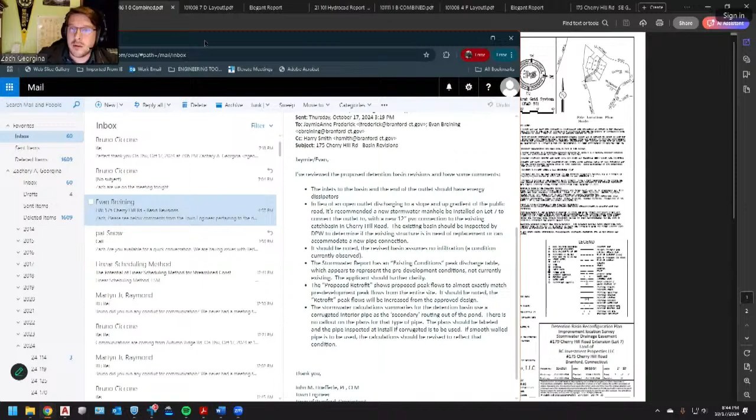If we look here, what he's discussing is... there we go. We currently have this outlet from the underdrain daylighting and going essentially down a grassed swale path to connect into the right-of-way and then tie into these catch basins. We just installed these two brand new catch basins here.

Rather than installing a manhole and coming along to tie in, I would recommend installing a manhole and tying into this basin, just because we know that that's new infrastructure. But I think that could be addressed between the town engineer and myself.

It should be noted the revised basin assumes no infiltration, and that is stated. The calculations around this new basin are assuming no infiltration, as I can't rely upon it. The stormwater basin report has an existing condition peak discharge table, which appears to represent the pre-development conditions not currently existing.

The applicant should clarify the text of my stormwater report does state that this is referring to the original conditions of it, but I can revise that report no problem and fix that heading.

The proposed retrofit shows proposed peak flows almost exactly matching the pre-development peak flows from the entire site. It should be noted the retrofit peak flows will be an increase from the approved design. This is correct, that it's an increase from the approved design, but it is still matching the original conditions, the 2021 conditions.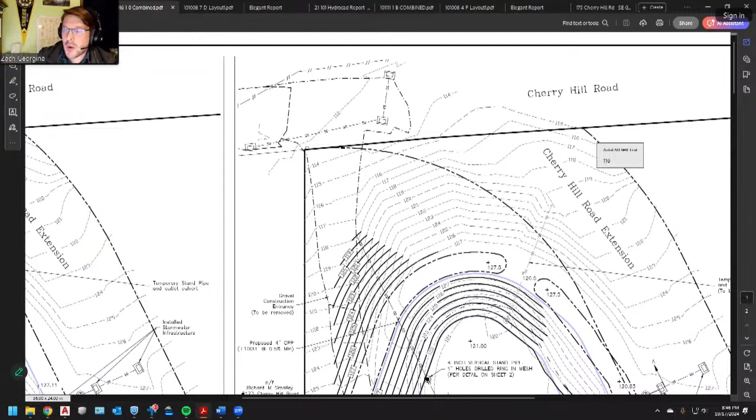The rationale for this, just so you guys are all aware, is because of the situation with the basin having essentially a zero infiltration rate, even with the sand filter, it's a slow drain. So by allowing for this increased flow out with a vertical stage discharge pipe included in the sand filter, it allows us to empty the basin in a timely fashion so that it has capacity for back-to-back or future storms. This was designed specifically to get as close as possible to draining the basin fast while not exceeding 2021 conditions.

His last comment was that the stormwater calculation summaries for the detention basin use a corrugated pipe as the secondary routing out of the pond. There is no call out on the plans for this type of pipe. The plan should label the pipe to be inspected at install if corrugated is to be used. If smooth wall pipe is to be used, the calculations should be revised to reflect that condition.

The pipe he's referring to, if you look right here at the screen, it's labeled with the SD line coming through the berm and daylighting. That is this proposed corrugated plastic pipe.

Why I'm specifically choosing to go with a corrugated pipe versus smooth lined is the decrease in velocity through that pipe. So it's a lower velocity exiting that pipe, which is going to be beneficial in terms of limiting any erosion with this pipe daylighting onto the grass.

If Mr. Offerly wants to go with, we agree to go with the manhole and tie into the catch basin, I'm fine switching to smooth lined and amending the HydroCAD report for him. But it was selected with that daylighting in mind to intentionally limit that velocity within the pipe.

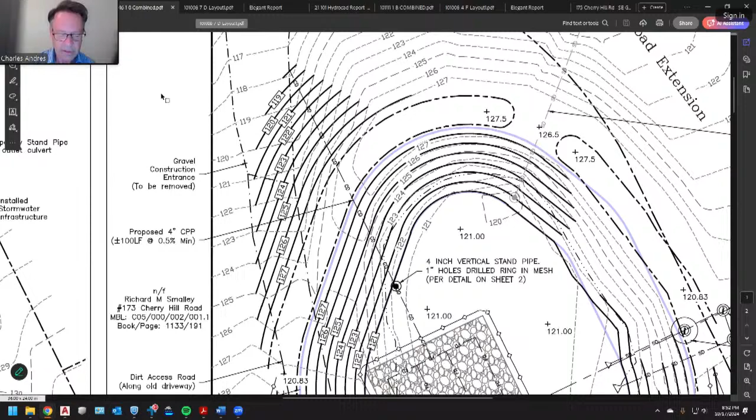Let's go on to the next one then, which is for lot 11. So you want to tell us about the first one? Same item, I guess. First, if we need to waive the public hearing for that one. Give me a minute, I'll do the exact same approach here. Just let me get to those materials. Okay, I want to close that. Not that one. There we go.

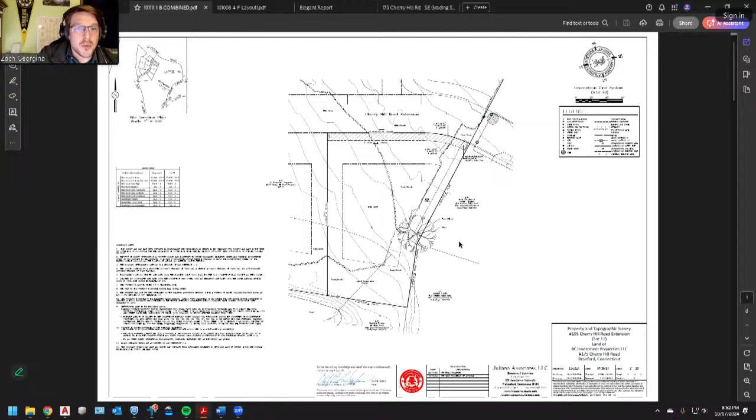Okay, so for lot 11, previously approved did not have a pool. So what we are looking at here is the previous subdivision approval resulted in the grading for the house terminating prior to the upland review area. With the addition of the pool, this application has now been through wetlands and received an approval. But addition of the pool is now going to be pushing this grading further out, approximately 4,600 square feet or so beyond what was in the original subdivision approval, grading wise. So that's really the crux of what this entire application is, they want a pool, and our grading from what was originally theirs has a 4,600 square foot impact. Okay, so you modify the grading. Correct. Okay.

That seems not a major change. I mean, in terms of the public hearing stuff, what are people's thoughts? Joe, what do you think? Yeah, I guess I'm wondering what contribution a public hearing would make to inform the engineering decision. Yeah, and I'm feeling that it's probably a really, it would be a totally pro forma thing if we tried to have a public hearing for it.

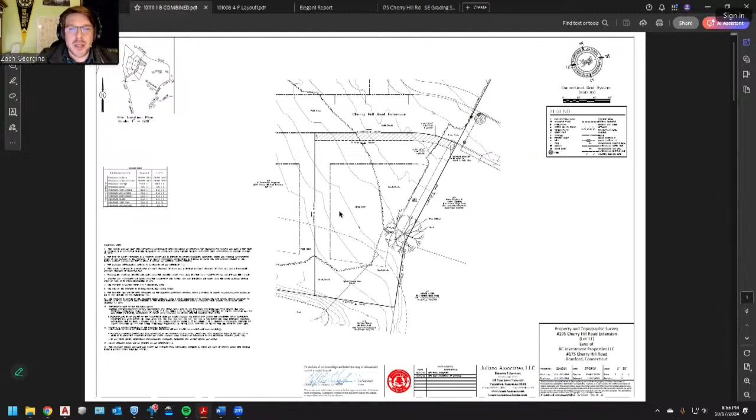Back in 2021, the site was historically a farm use, had been left for a decade or more to essentially overgrow. Presently had an emerging field species that was mowed a couple times annually, and a growing woods and brush incursion in the northwest corner.

As well an established woods and brush in the southeast corner of the property. What we're looking to do overall here is to develop it into a single family home with the in-ground pool.

Due to the size of the house and the pool, we did end up having to go to wetlands. We are going to be developing into the wetland, or the 100-foot upland review area.

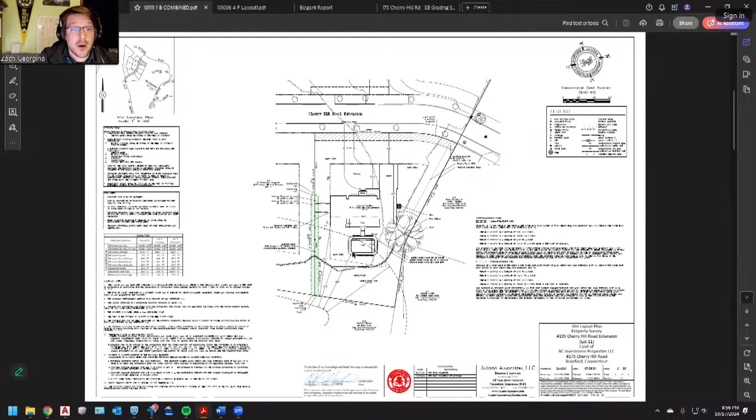Wetlands did have some conditions of approval. We ended up installing a vegetated swale to address the Cultec infiltrator system we installed to offset the increase in the size of the house.

Specifically, the pool is designed to have a self-containing gravel infiltration system. So essentially, the edge of the patio is surrounded with a gravel inlet.

That inlet, as stormwater sheets off of this, falls into the gravel inside and is slowly infiltrated into the ground along the pool. So essentially, it offsets itself in terms of impervious surface.

Obviously, the pool needs a level spot, so that results in the grading being pushed out further to the toe. We are, as this is a bit of a subdivision, I know that a question Wetlands had, just to be on the same page.

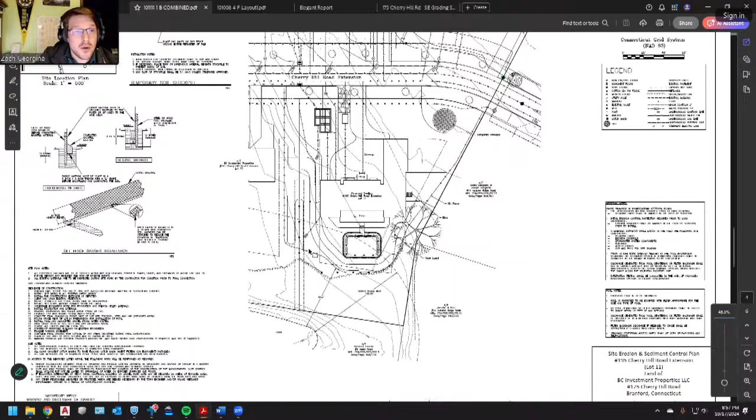This does show grading onto lot 10, as lot 10 has not yet been developed. The goal is to tie this into natural grade as quickly as possible, and when lot 10 is eventually developed.

This grade will be picked up as originally planned and continuing to tie into the foundation of that structure as well. We're able to decrease peak flows.

Both this house is tied into that earlier mentioned basin. So we're able to decrease peak flows going to that basin as well as to the rear of the property, which is then draining towards the wetland located on 9 Abbey Road.

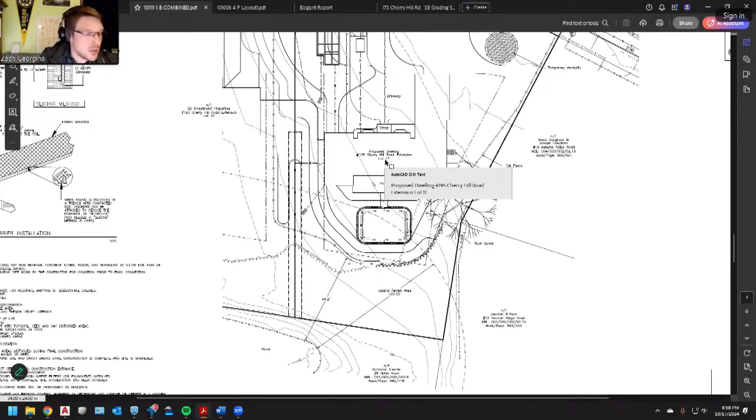And I think that really gives us a good overview of where we're at. If there's anything specific question-wise, I'm more than willing and ready to answer. But I think that gives a good overview.

Thank you, Mr. Georgino. Does staff have any comments on this? Yeah, I prepared a report. I think Zach did a good job of summarizing the project. Some minor changes for a single-family home to install a pool, or minor change to the grades in that rear.

Just so happens to be within 100 feet of a wetland. They did receive approval from the Inland Wetland Commission for this one. They meet the earth slope 3-to-1 ratio requirements, and based on the application materials, it appears the special exception criteria are satisfied. You guys had waived the public hearing.

Staff recommends one finding, that the special exception criteria appears to be satisfied, and three conditions. Prior to start of construction, erosion control measures shall be installed.

Condition 2, any lighting has to be compliant with section 6.7. And 3, any necessary measures to control any dust or any additional measures to control soil and erosion determined to be necessary shall be installed.

Okay, so this one doesn't have any of the outstanding engineering stuff, looks like. So, and Evan, I think you had that as that was in the report that you sent out. So I don't know if you want to display that.

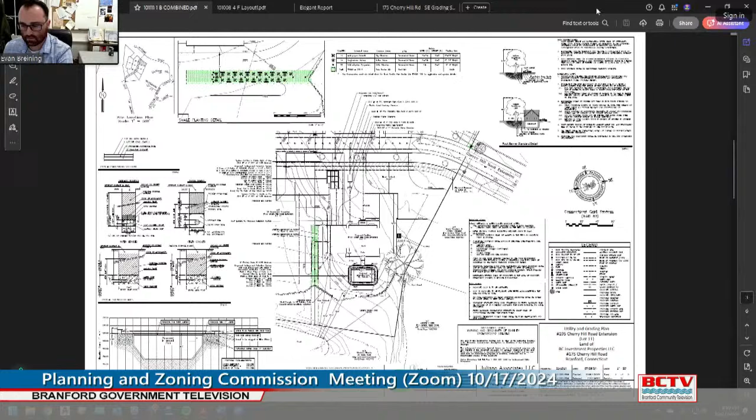Sure, one second. Let me stop sharing.

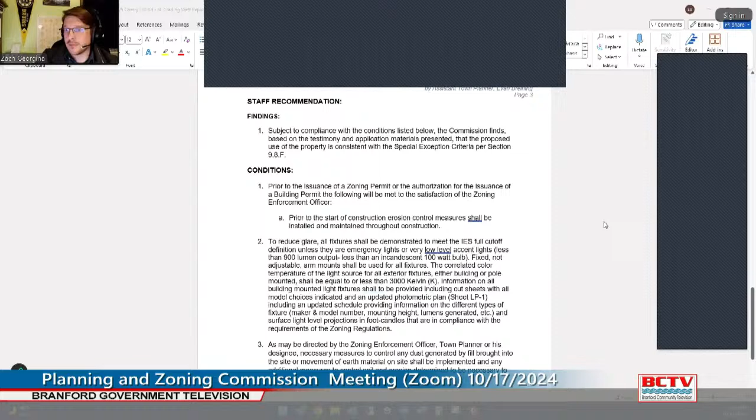Does anyone have any comment with respect to this one? Looks like this one we could approve tonight.

If no one has any comments, someone will make a motion to approve the modification by adopting the findings and the 3 conditions in the staff report displayed in front of us. Fred Russo will make that motion. Motion to approve by Fred. Is there a second? Marcy will second it. Second by Marcy.

Further discussion. All those in favor? Joe Chadwick? Joe Chadwick is in favor. Fred Russo? Fred Russo's in favor. Marcy? Marcy's in favor. Joe Vayuso? Joe Vayuso in favor. And chair is also in favor. So that application is approved.

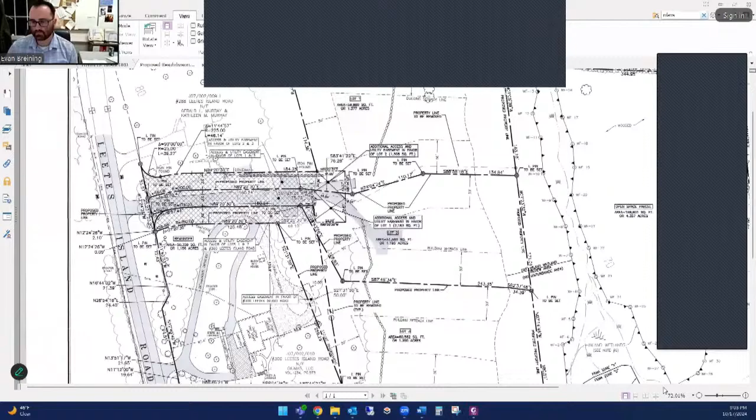So this is Doug Anderson, AHD Holdings. We're the applicant and owner of the property. This is the last single family home in a three lot subdivision over on Leetes Island Road. Basically, a pretty simple request. Lot 1 is a home we're finishing construction on now, probably 95% complete. Lot 2 is an existing home that's been occupied for about a year or so.

Given the way the configuration of the original lot lines were, if you look on the plan, there's a dotted line that was the original lot line. You can see they're fairly parallel towards the back of the property, and then it kind of dove hard and came into the front of lot 2, then dove back into a kind of zigzagging form. So given the site conditions, and the way the lot 2 house sat relative to the lot 1 house configuration, we're trying to straighten that line out to get the driveways to flow better and eliminate a property line that would literally sit right in front of lot 2.

We're proposing to just modify that line slightly. So what we've done is taken the line and moved it about 10 feet towards lot 2 on the back half of the lot, and eliminated the deep dive of the triangle into the front of lot 2, to allow his front yard to feel and flow better versus having a property line that dove in front of it.

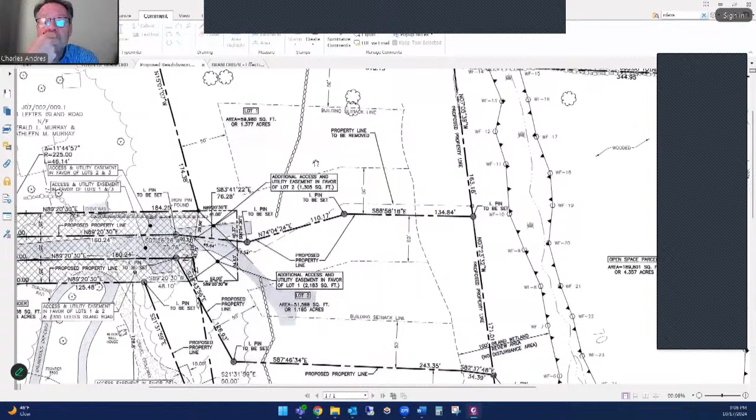So technically it's not a subdivision application. It's not a re-subdivision. I think our regulations probably say that if you're modifying something, you should get approval. Is that what it is? Yes, section 610, modification of approval.

Any subdivider seeking to modify an approved plan, including but not limited to any revision of lot lines shown on such plan or any condition of approval, shall file an application for modification with the commission together with the required fee.

And according to staff, the modification doesn't create any zoning violations. No, it does not appear to. Okay. Anyone have any thoughts or comments?

Does someone make a motion to approve the lot line modification for this subdivision at 292 and 300 Leetes Island Road? Joe Vayuso moves to approve. Motion to approve the lot line revision by Joe Vayuso.

Is there a second? Chadwick seconds. Second, Joe Chadwick.

Any further discussion? All those in favor: Joe Chadwick is in favor. Fred Russo is in favor. Marcy is in favor. Joe Vayuso is in favor. And chair's also in favor.

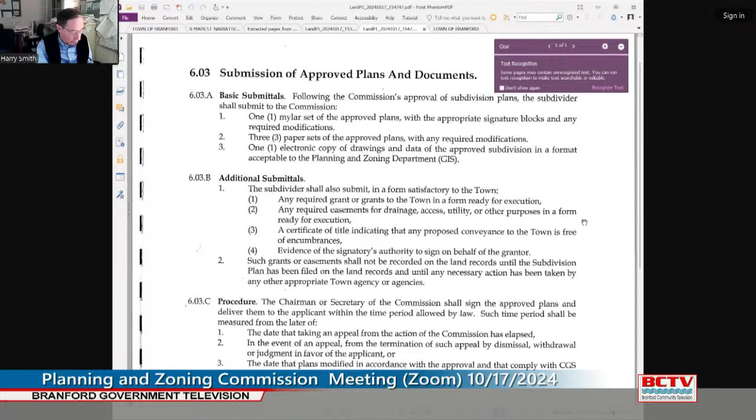So to solve some of those concerns, this is being proposed for examination. A lot of other towns, I think the majority along the shoreline, have them, including Guilford, for example. I think the committee is going to be searching out examples to use and other communities' experience. There's a couple of things in the state statute, and I'll send all this information in writing to you if you're interested. I think Masimo and Sharon both expressed some interest, and Chuck, I think you wanted to follow it as well. The one thing that struck me was there's a required referral process for applications to the Planning and Zoning Commission, among other municipal agencies, for any proposal affecting real property on, in, or contiguous to the harbor.

That's received by zoning, planning commission, or combined commissions, ZBA, historic district commissions, flood prevention, coastal climate resilience, and erosion control boards. There are several other agencies cited. The referral for any real property contiguous to the harbor is the area the harbor management plan would address, and the plan itself would establish the area of its jurisdiction.